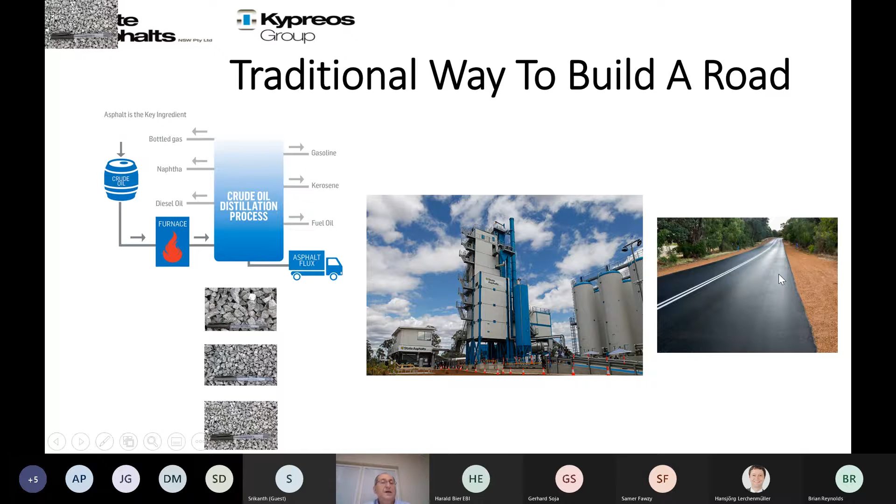Our research and development lab of the Kypreos group is in St. Mary's, the new plant of the Kypreos group, and is equipped with the latest testing equipment. Our research is focused on increasing the use of recycled material in asphalt mixes. We have a lot of work done with glass, plastic, rubber, and paper. We secured a $3 million research grant with the federal government on the plastic research.

The biochar used in this work is coming from Rainbow Bee Eater, and I'd like to present a few things from their plant. The biochar is produced by pyrolysis of timber and plastic. I know biomass is a general term, but I'm talking timber and plastic because so far I used in the asphalt only biochar from timber and biochar which comes from plastic.

It's produced in the absence of oxygen. It's rich in carbon and stable. It's porous with high moisture content. Fine particles of biochar from Rainbow Bee Eater were chemically treated with Fenton acids, which are bitumen friendly. The chemical treatment changes the biochar surface, which can then bind to bitumen.

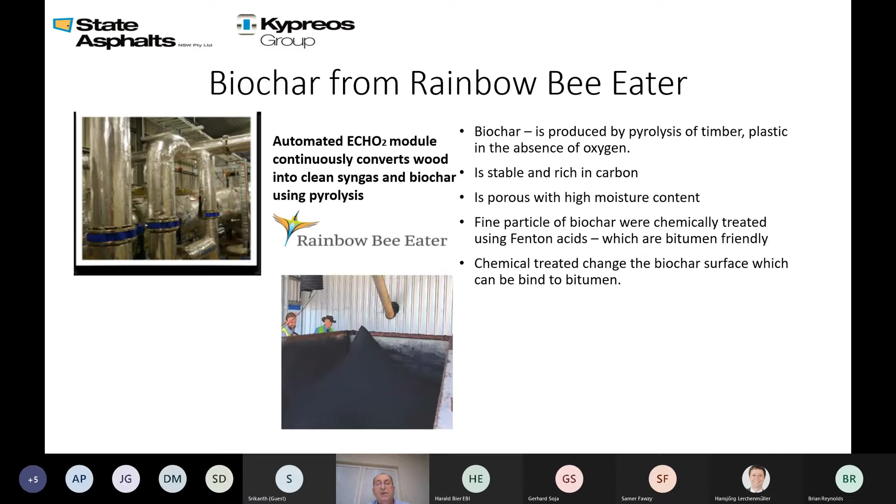To prove the change on the surface of the biochar, we did an FTIR of the untreated and treated biochar, and you can see the difference between the untreated, the blue one, and the treated, which shows some peaks around 3,000 wave numbers, which prove some change, very close to the signal which bitumen gives you in the FTIR.

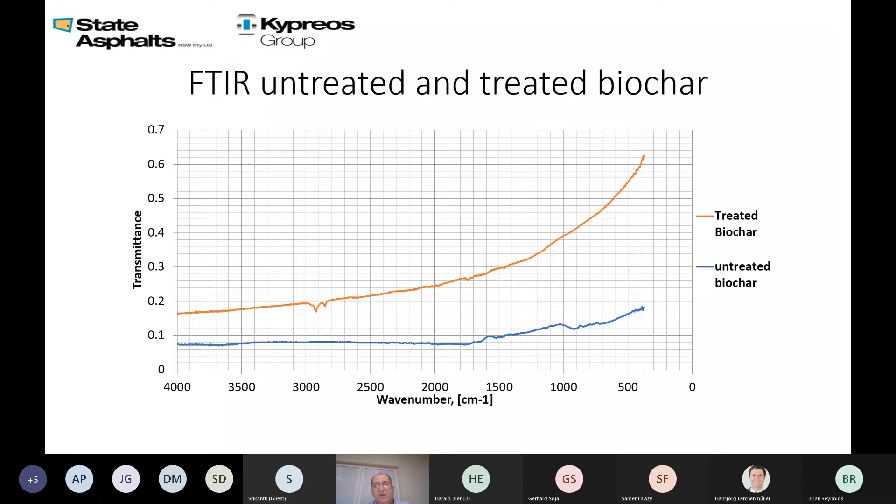In Australia, bitumen is classified based on the viscosity at 60 degrees, and it comes in different grades: 170, 240, 320, 450, 600. This is based on the viscosity at 60 degrees; the soft bitumen is 170, and other grades are obtained by oxidation.

What I want to show is the viscosity after the rolling thin film oven, which is an oxidation procedure for the bitumen to identify its properties after it is used in the asphalt plant. For the 450 bitumen, you can see the viscosity after the rolling thin film oven is between 850 and 1,300 Pascal seconds. Why am I stressing this? Because you will see later the biochar effect on the bitumen regarding viscosity after oxidation.

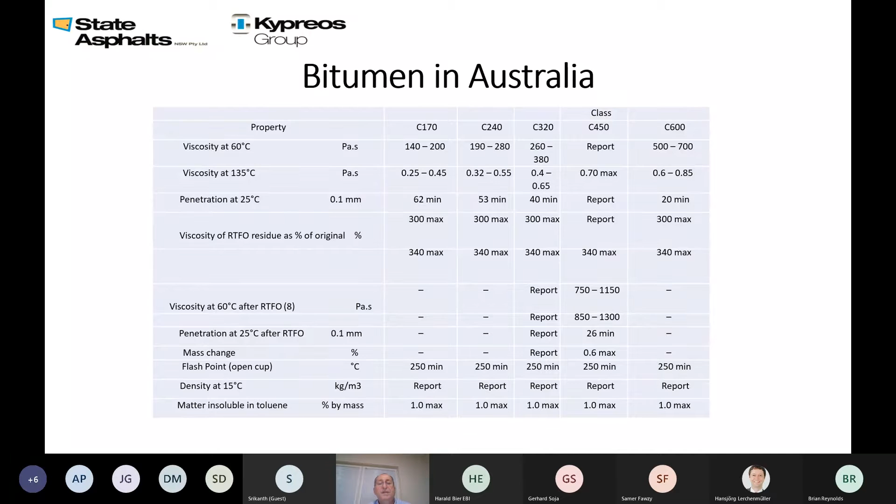With biochar, the viscosity of the bitumen starts to increase with the percentage of biochar. 0% is the soft bitumen used for this work, and when you increase the biochar in the soft bitumen, the viscosity at 60 degrees starts to increase. In the end, 25% biochar with the 170 bitumen is equivalent to the 450 binder. The viscosity is 420, 425 Pascal seconds at 60 degrees, measured with the capillary tubes.

All these samples were oxidized using the rolling thin film oven. Then the viscosity was measured again, and the change of viscosity after oxidation can be seen in the graph on the right side, where the untreated, unmodified 170 soft bitumen has a very high change in viscosity, more than 200%. When you increase the biochar content in the soft bitumen, the viscosity change becomes lower, which means the biochar helps stop the oxidation of the bitumen, which improves the life of the asphalt on the street, because it stops the oxidation from the sun.

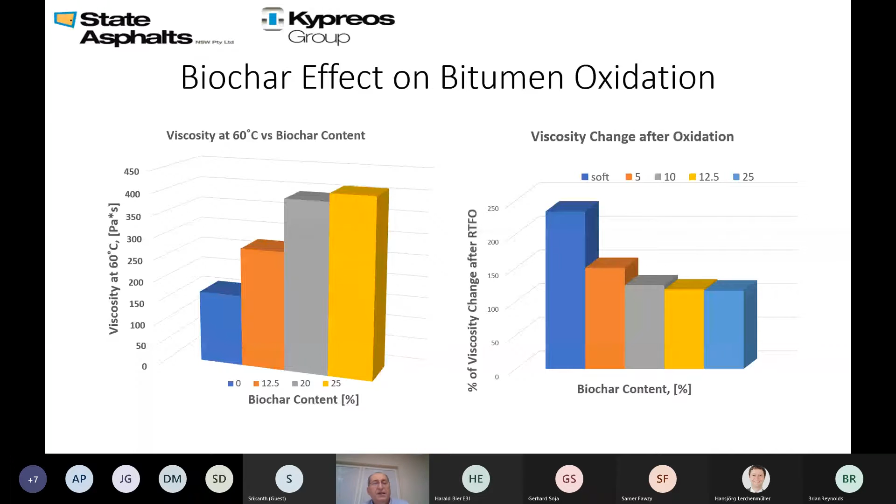Modifying with the biochar. The chemically treated biochar was mixed with the bitumen to make a biochar modified bitumen. Then we used aggregates and the biochar modified bitumen in the mixer in the lab to make the biochar modified asphalt. Here you can see a briquette of the modified asphalt, which was used for testing.

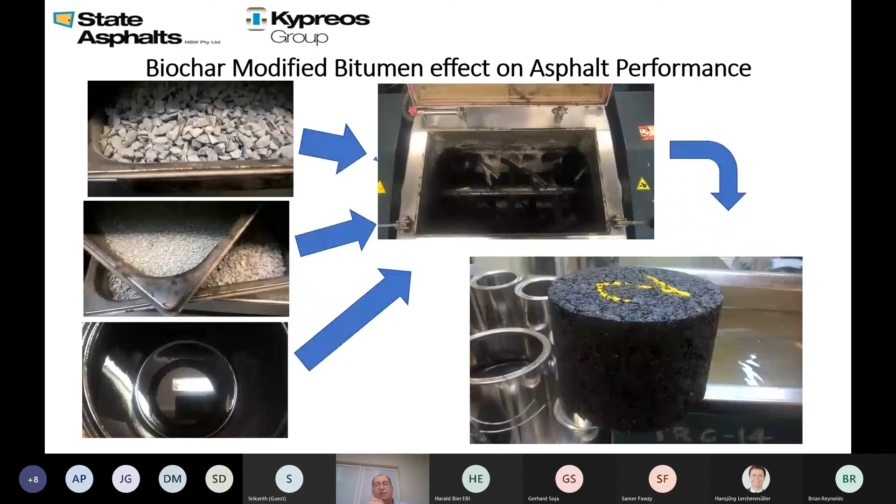What is wrong? It gives you poor fatigue. The biochar in the asphalt gives lower fatigue than normal bitumen, because it increases the strength of the asphalt. You lose some properties in fatigue and flexibility of the asphalt. But we are working to improve it using crumb rubber, which gives some flexibility. The experiment is underway.

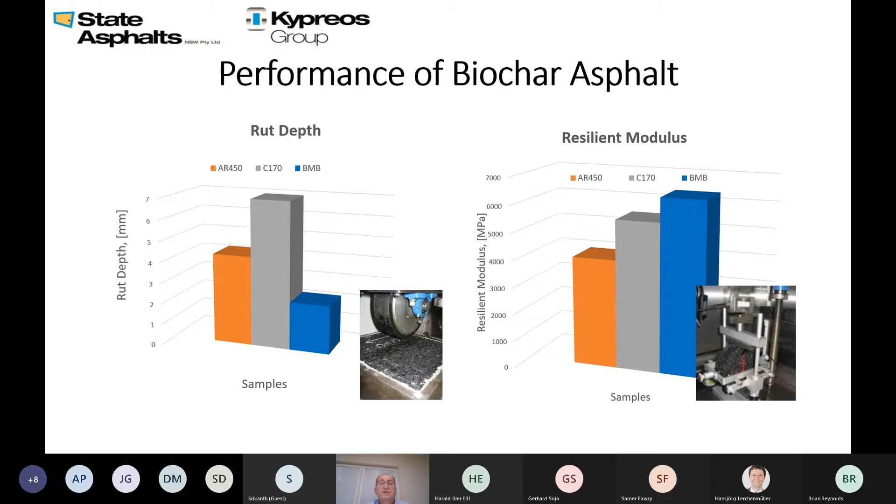The big issue with biochar in asphalt was the dust, because when you pre-blend the biochar with the bitumen or use it straight in the asphalt plant like a filler, there's a lot of dust. The next step was to find a way to fix the dust in the asphalt plant, and we tried plastic encapsulated biochar. It means the chemically treated biochar is inside these plastic pellets.

The big issue is this doesn't allow you to use too much biochar in the plastic, because the biochar is very porous and has a lot of moisture. The biochar I used had moisture around 27%, and it's very hard in the plastic industry to use biochar with plastic, because when you increase the temperature of the extruder to get the pellets, the moisture from the biochar comes out as steam, and it's hard for the equipment to work. The plastic is recycled plastic, which is suitable to go in the asphalt.

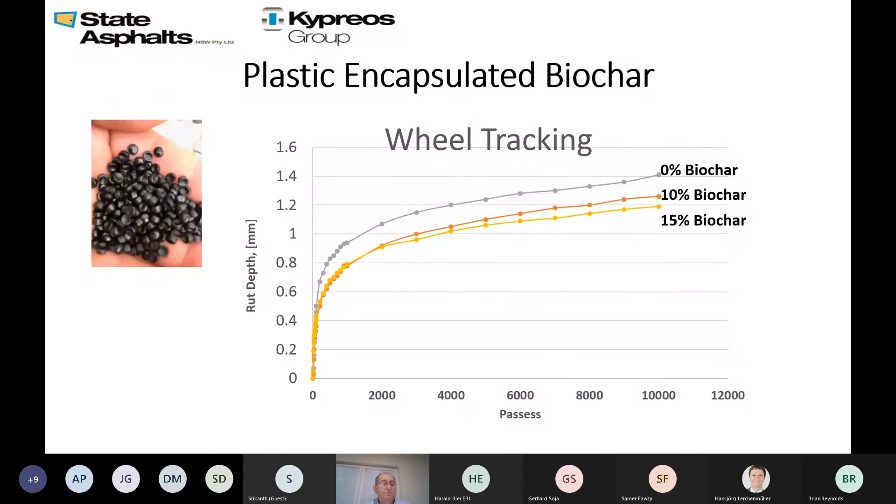The next step, we use the plastic-encapsulated biochar as an additive to modify the processing oil from the biofuel business. In the biofuel business, some of them use crumb rubber, others use timber, others use plastic. I'm not an expert in this area, but I'm telling you what the supplier advised me. They have a biofuel, some process oil which comes as a residue, and the biochar. The biochar encapsulated with the plastic can be used to modify the processing oil and make the green bitumen, which doesn't contain traditional bitumen.

We prepared a green asphalt briquette using this green bitumen, and the resilient modulus was around 3000 MPa. We are working on this one to see what the properties are and if the test method we're using now is suitable to characterize the new binder. Because with the new binder with plastic and biochar, we get a 100 degrees softening point, and the viscosity was really high, so it's very hard now to see if this green bitumen can be characterized with the same testing equipment and testing procedure we're using for the traditional bitumen from oil.

Thanks a lot, Alex. This is highly interesting. So what I've seen is you're actually creating an asphalt with significantly better performance than conventional asphalt, right? Look, there are some properties that are a winner. Some of them, like fatigue, at this stage are the loser. I'm trying to find a way to make all of them winners, but it will take some time to find the right recipe.

Okay, I do not see the chat. I don't know why, but maybe someone could help me. Do you see the questions in the chat? Yes, there were people responding to the chat, and it is in the top line next to the 3 dots. Yeah, no, it doesn't show here. Okay, well, some at least had the chance. I think we should start with the discussion, and then later on I will present the result of the questionnaire. But as I said, I do not see the questions that were asked in the chat.

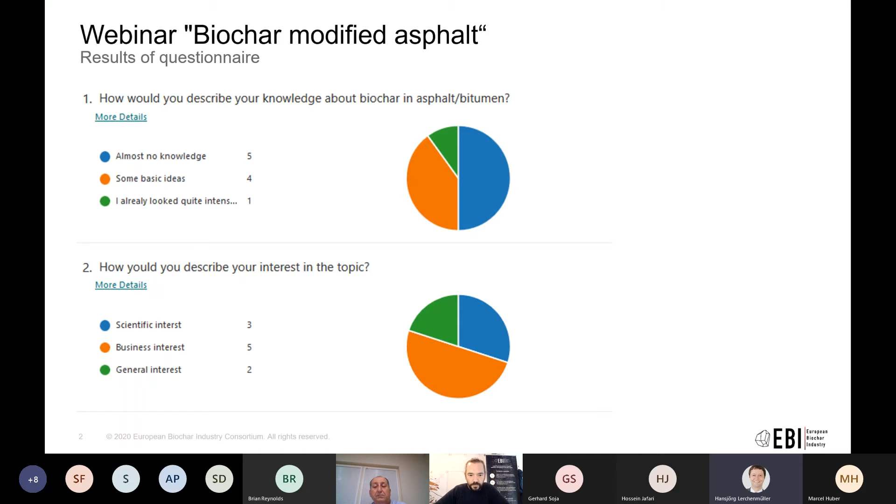You can see my screen now. We got in total 10 answers, and most people had no knowledge to only some basic idea. The interest was mostly business driven, and on the applications, building materials and asphalt are the two winners. That might not be representative, because people joining the webinar are obviously more driven by the vision that biochar can go into asphalt, bitumen, and building materials. But still very interesting.

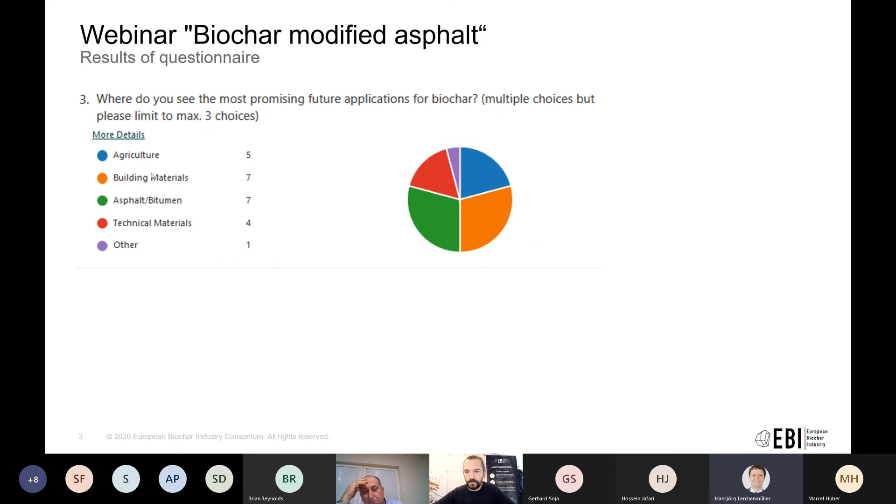Thanks a lot. Yes, it is interesting because in many discussions about biochar, it's the agricultural uses, and people neglect the other types of uses that will be more important in the near future. This is why we're so thankful for the work people like you are doing, Alex, to get us onto a path where we can use it in a profitable way, not only as a substitute to store carbon, but to have a superior product that could outcompete conventional products, and so create long-lasting carbon sinks through an improvement of products. That's actually the aim we have.